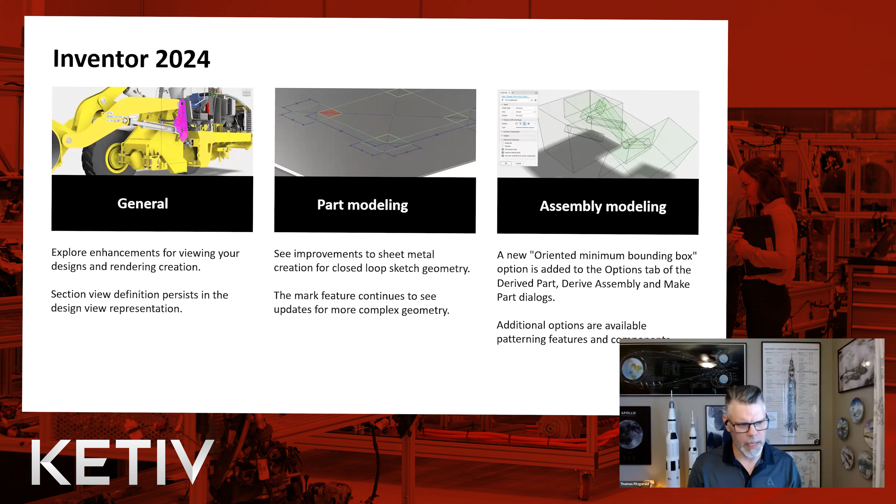All right. So the way that this presentation is broken out, we're going to be looking at very specific categories of features within the general feature upgrade environment, part modeling environment, the assembly modeling environment. There's a new feature for finishes that we're going to be talking about in the presentation. Autodesk has provided a few updates relative to 3D annotations. Those of you that are using 3D annotations, you might find some pleasure in understanding more around those updates.

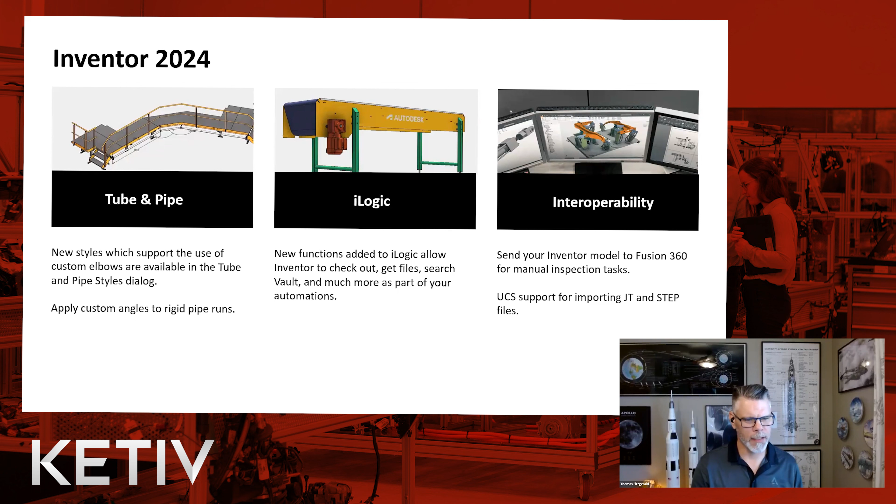In the drawing environment, there's a number of different updates that we're going to be talking about as well. Tube and pipe, there's a small updated feature there that is going to be impressive for those of you that are interested in and utilize the tube and pipe environment. For all of my iLogic fans out there, there's a really interesting capability that has been enhanced within iLogic, very specific to Autodesk Vault, that I'll be touching on, and then some interoperability updates as well.

All right. So getting into the general enhancements for the Inventor application. Section view definition persists in the design view representation.

With this release, you can easily edit the section view definition or suppress the section view by right-clicking on the view representation node and clicking section view. You can edit or suppress. So some updating in the right-click menu in terms of what you can do around your section views.

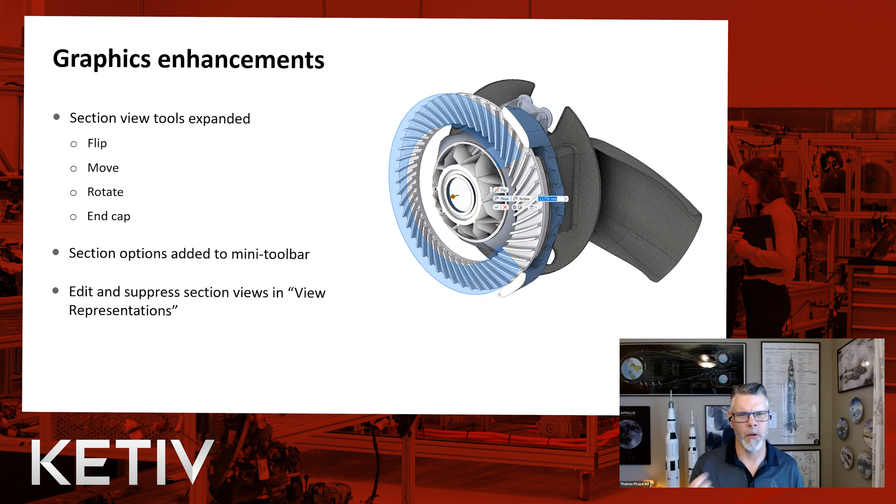Previously, you could only access section views using the context menu commands. Now the section view commands and options are added directly to the mini toolbar. So as you've noticed over the previous releases, Autodesk has been updating the UIs and the different toolbars that you interact with different functions and features. This is kind of to align with that initiative of updating the look and feel of Inventor for users.

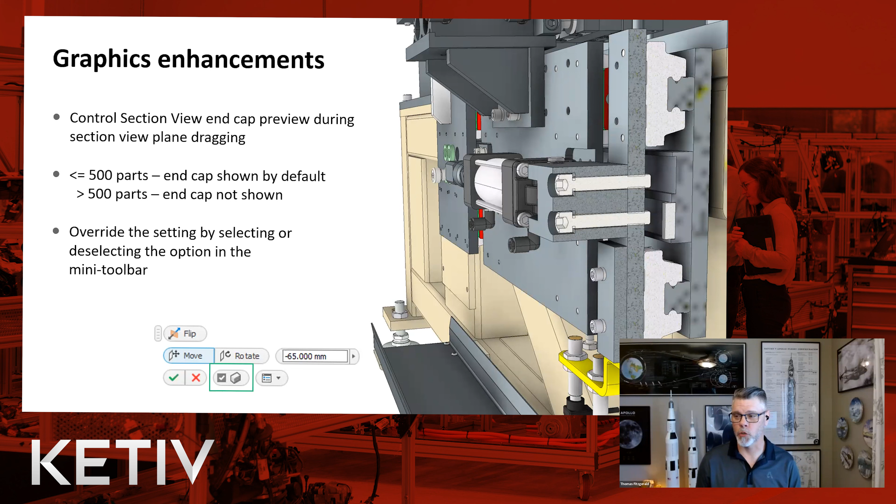In terms of graphics enhancements, there's a control section view end cap preview during section view plane dragging. So as you drag the section view, you're going to see additional information to assist you in your section view functions there. So end cap visibility is set by default to display end caps for sectional geometry when the part count is less than 500. If the part count is greater than 500, then the end caps will not display.

And this is for performance reasons, right? We want to minimize some of that graphical information that we're being presented so that way you have a better performance experience when using Inventor, okay? So you'll see there's an opportunity to check a box and to turn on end caps or not turn on end caps.

Other things relative to graphics enhancements, there's a resolution maximum now set by 16K. There's also the availability of utilizing image-based lighting styles when you're working within Studio. So if you want to do a photorealistic rendering of something that you've produced inside of Inventor, you can pull in a background that gives you a more realistic look as that environment that you might be putting your information or your 3D data in. Okay, and there's also a ray tracing update for those of you interested in photorealistic renderings.

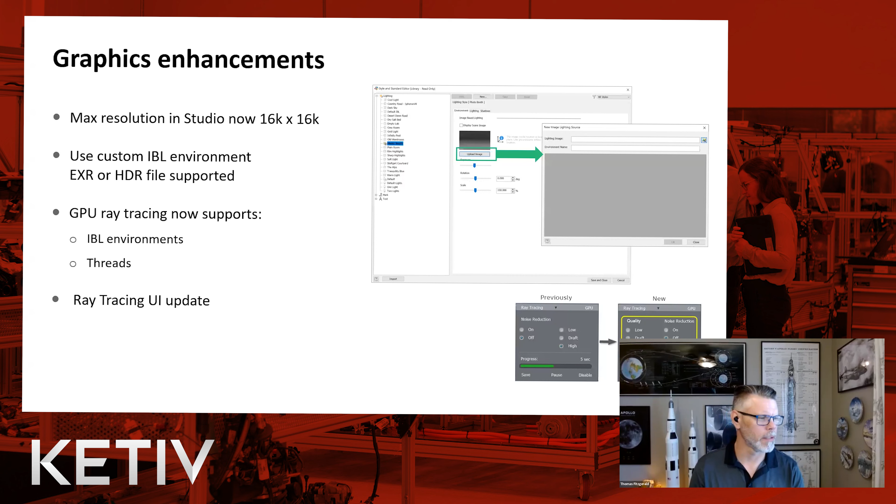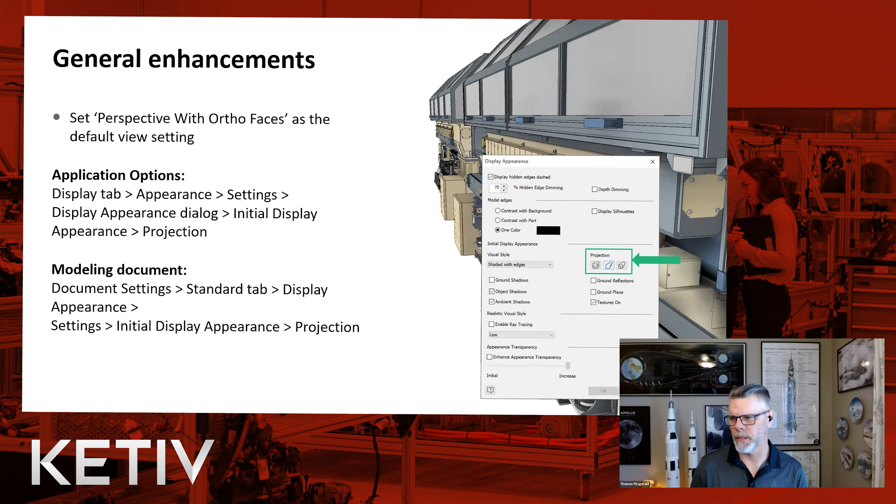Some other general enhancements, really around setting ortho faces. You'll see that inside of your application options, there's another button for your projection views. So now you have an opportunity for ortho faces to turn on and off, setting right within your application options. Okay.

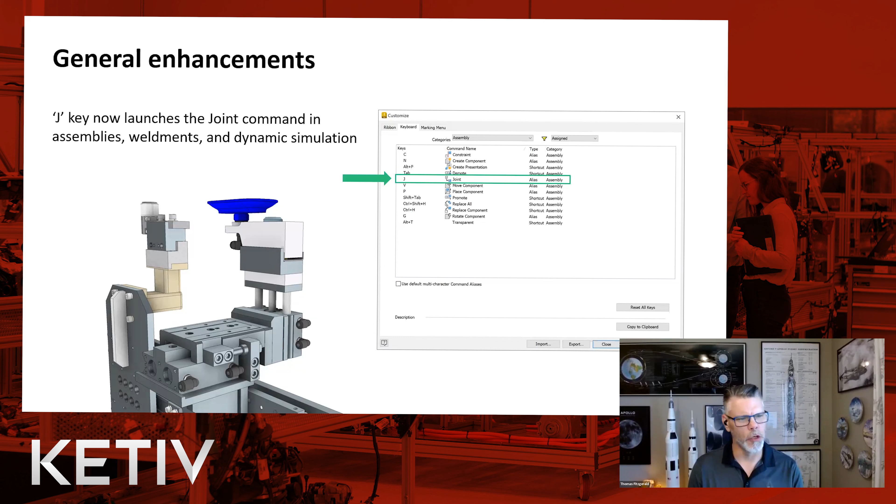In terms of hotkeys, I'm sure there's a few of you out there still using hotkeys to quickly initiate different commands. There's a new one for the joint command. The J key is a default hotkey now for if you're using joints in conjunction with constraints within your assembly environment. Okay.

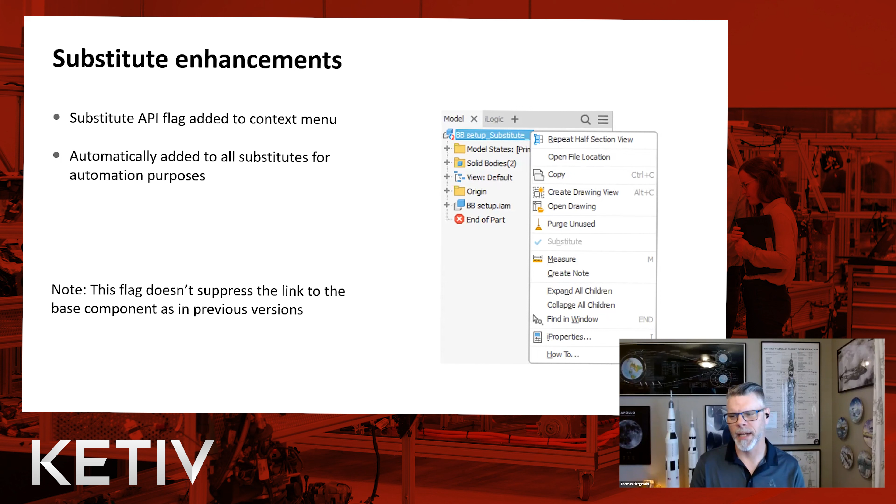When it comes to working with substitutions, if you're really the kind of company that's utilizing large model design, if you have a lot of different parts and you leverage substitutes in order to enhance that performance of those large models, there's a way to flag now within the context menu if you create a substitute, if it's a substitute or not. So you have a little bit of visibility as to which one of your models are actually substitutes as opposed to non-substitutes. So this change affects primarily part documents. Whenever you have a new part document in the context menu, it'll let you know if it's a substitute or not. So once again, better communication and visibility.

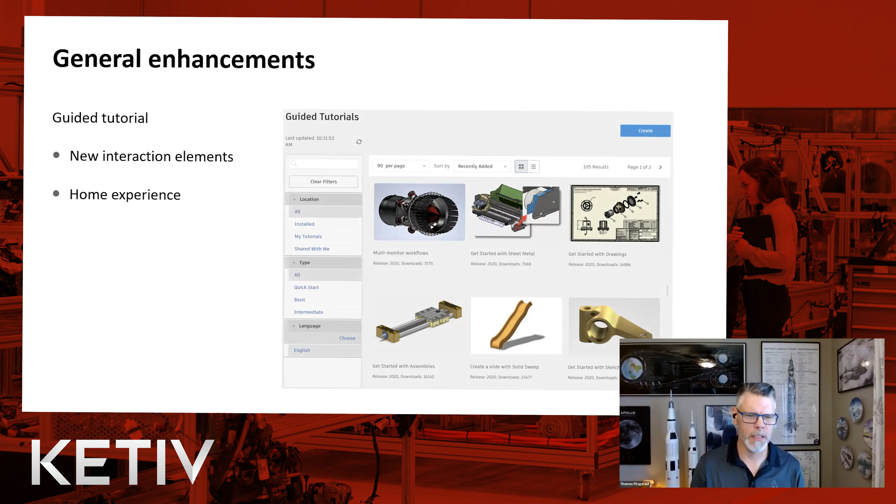Within your general enhancements around your guided tutorials, the home experience is a little bit updated, so you can peruse and navigate through your guided tutorials a little bit better. So that way, if you're trying to access very specific information to learn how to do particular functions or activities, the user experience here is greatly improved for you to be able to find the information that you're trying to access. All right.

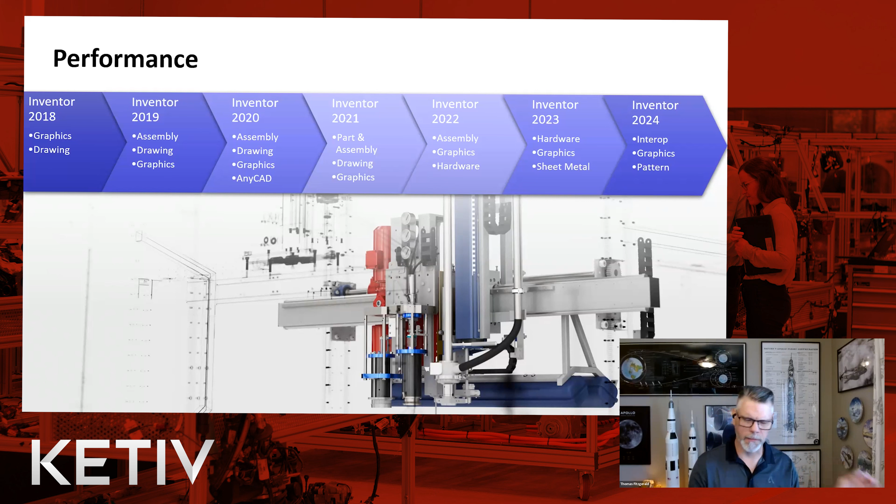So over the course of the last series of releases, performance has been a big issue, something that Autodesk has been really trying to focus on. In Inventor 2018, 2019, you'll see the entire life cycle here of performance improvements over the previous releases. So in 2024, we're focusing a lot in terms of performances around interoperability, graphics, and the ever so demanding patterns, working with different patterns within our part environment as well as our assembly environment. All right. And here's a video around the graphics area.

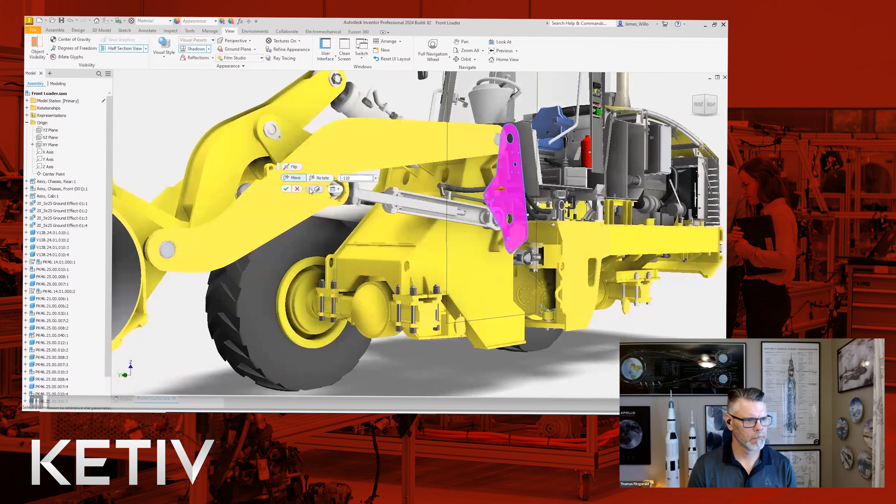In the application options, it's now possible to set perspective with ortho faces as the default display appearance. We've also improved the sectional view tool to add an end cap toggle. This helps you to see more clearly which solid items the view is directly cutting through. Another cool feature is the ability to rotate a sectional view. Click the toggle button in the mini toolbar and then use the in-canvas overlay to rotate the cut. This is also supported in 1/4 and 3/4 sections.

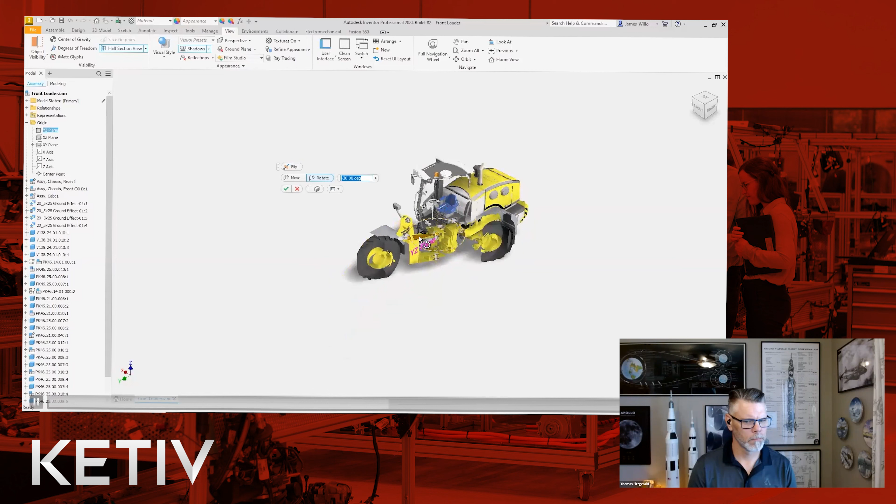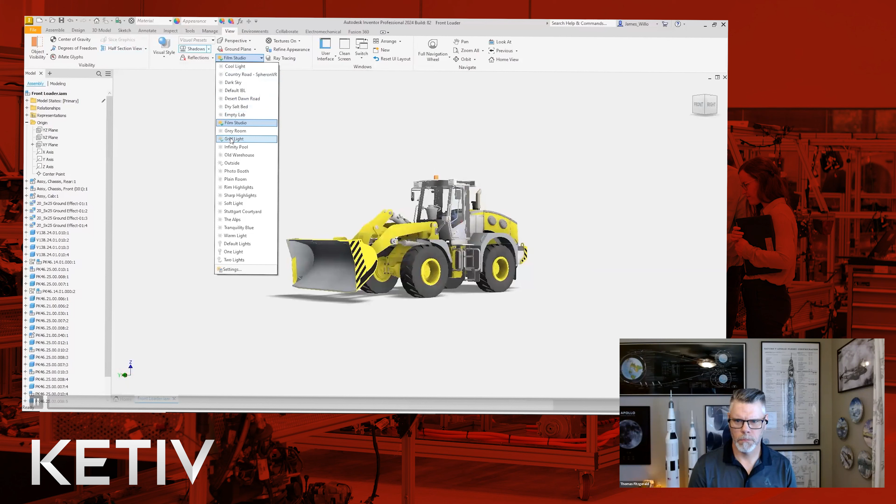We've made it much easier to create your own IBL environments. Simply create a new style, click Upload Image, and then select the HDR image you want to use. There are hundreds of different HDR images on various third-party websites for you to choose from. And if you prefer to use Inventor Studio for your rendering, we've increased the maximum render resolution to 16K. All this and much more in Inventor 2024.

All right. So as we go through each one of these sections, there's going to be a few of these small little 1 or 2 minute videos kind of demonstrating some of the features that we're talking about.

So, part modeling enhancements. Some of the things that we need to be focused on in terms of the part modeling environment: there's been some enhancements around sheet metal profile definition. So as you have different profiles, closed loop profiles within your sheet metal sketches, there's better performance in terms of being able to detect which profile you actually want to utilize within your sheet metal face.

When it comes to parameters, this one's popular for me, because I thoroughly promote parameterization of all models, particularly if you're going to be using automation. There's now a way for text and Boolean values to be exported, so we can use parameters within properties that are relative to text and Boolean parameters. We also have an option for true/false, 0/1, or yes/no, as well as a new unit type for parameters that has to do with hardness.

The mark feature. So new behavior around the mark feature. We have an opportunity to have it aligned, or we can have it go across the surface, as well as wrapping around the surface or projecting to a non-planar face. So additional functionality around the mark feature.

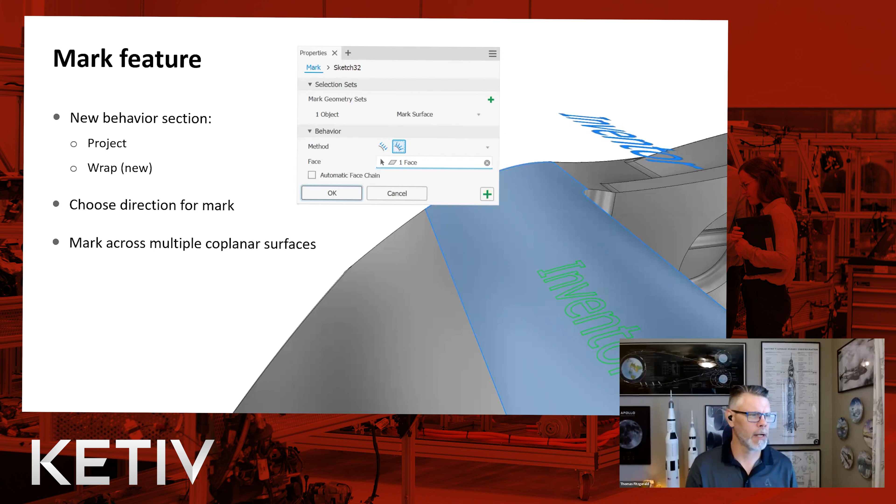The parameters window has 2 new improvements in Inventor 2024. The parameter window extends export functionality to text and Boolean parameters in the user parameters section. This allows us to access parameters in other places, such as the iProperties, where we can insert them as part of a live description, or simply display them in the custom iProperties tab.

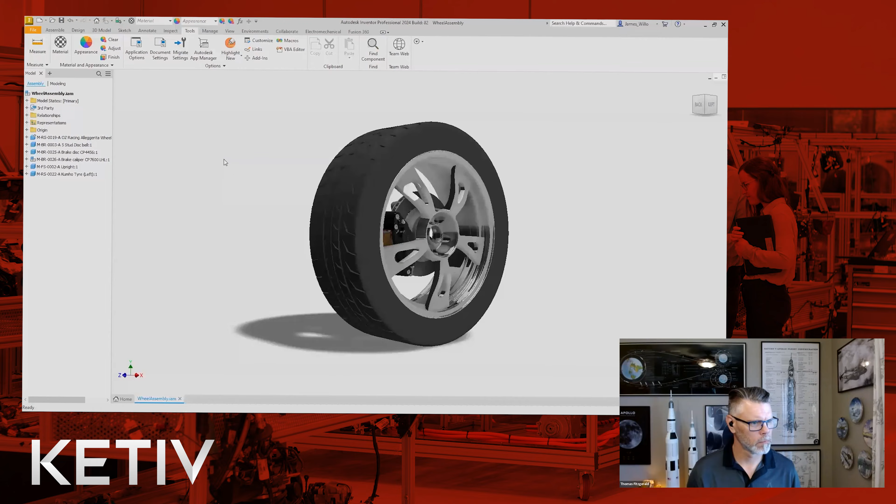Autodesk Inventor 2024. We introduced the mark feature in Inventor 2023, allowing you to laser etch or mark parts. We've now improved that in 2024 by adding a behavior section to the property panel. In addition to being able to etch in 3 different directions, there are now 2 different marking methods. Project will apply the mark across all faces in its path, even if they are not coplanar.

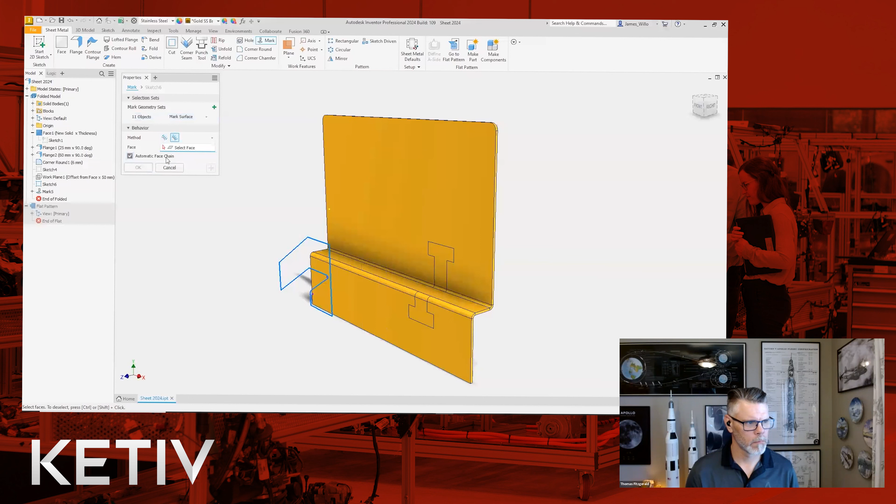We've also added the ability to wrap a mark. This allows the mark to be wrapped around corners or be applied to curved geometry, such as shafts or cylinders. And here are those same marks in the flat pattern. So that's the mark feature in Inventor 2024.

All right. So a couple of enhancements there in the part modeling environment. Now on to the assembly modeling environment. So enhancements here in assembly modeling. This is an interesting one. If any of you are using bounding boxes to understand spatial requirements of the 3D data that you may be producing, now there's an oriented minimum bounding box opportunity here.

So with oriented minimum bounding box, you can derive a solid body as an oriented minimum bounding box. The new option is added to the options tab of the derive part, derive assembly, and make part dialog boxes, so you're only going to see it in those particular dialog boxes. By default, the option is checked. Uncheck the box to derive a body as the orthogonal bounding box.

So as you rotate your different components, the bounding box will rotate with it, as opposed to being oriented relative to the environment in which you're working. Now, I don't know all the exact benefits of this. I would assume it would really have to do with understanding a true value when it comes to the amount of space that individual components or assemblies may be consuming.

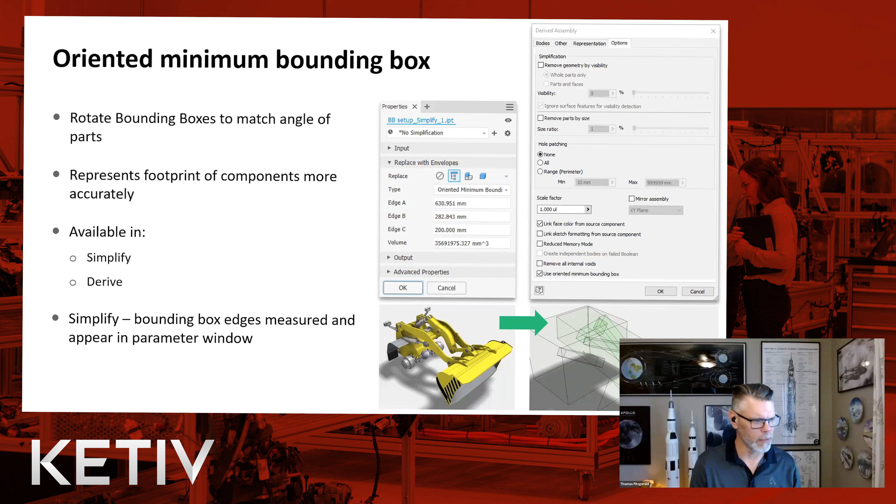Different pattern enhancements, particularly around circular pattern. So you can now select a revolved face, a cylindrical or conical face to define the direction for a component pattern. So the pattern component command uses the face axis to determine the pattern direction; use the standard controls to then flip it back and forth.

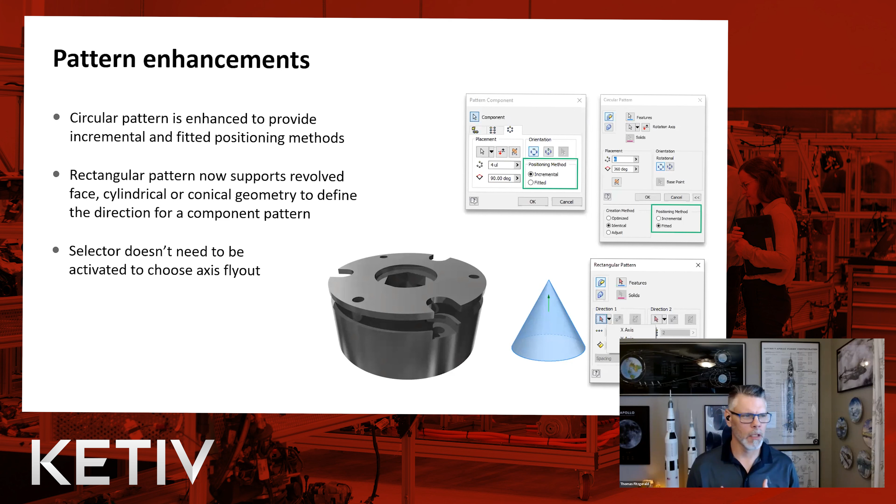It is not necessary to activate the selector when using the origin axis. Clicking the flyout activates the selector and chooses the selected axis. The direction selection does not change with the activation of the selector. You must also select a new direction. So it's prompting you for some additional information just to make sure that the circular pattern is working the way that you have anticipated. Okay.

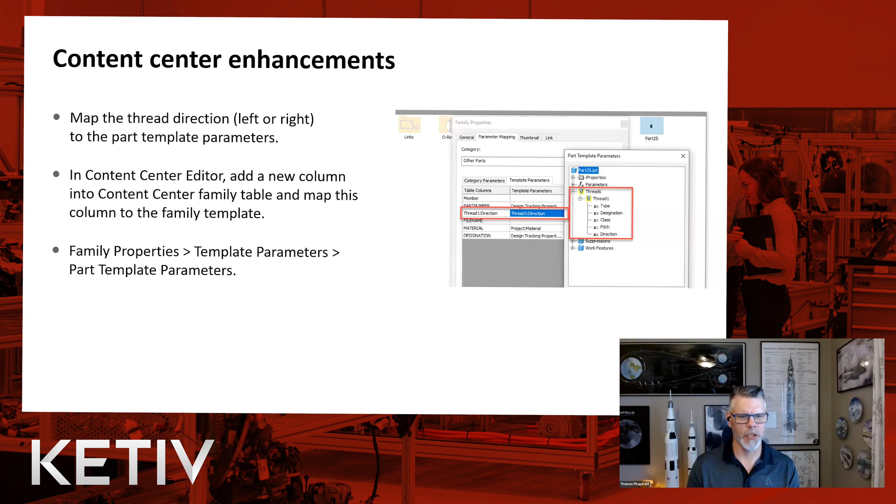There are some content center enhancements. When it comes to authoring custom content center information, you now have the opportunity to define your thread direction. So aside from type and designation and class and pitch, there's the new opportunity of being able to provide a thread direction as well.

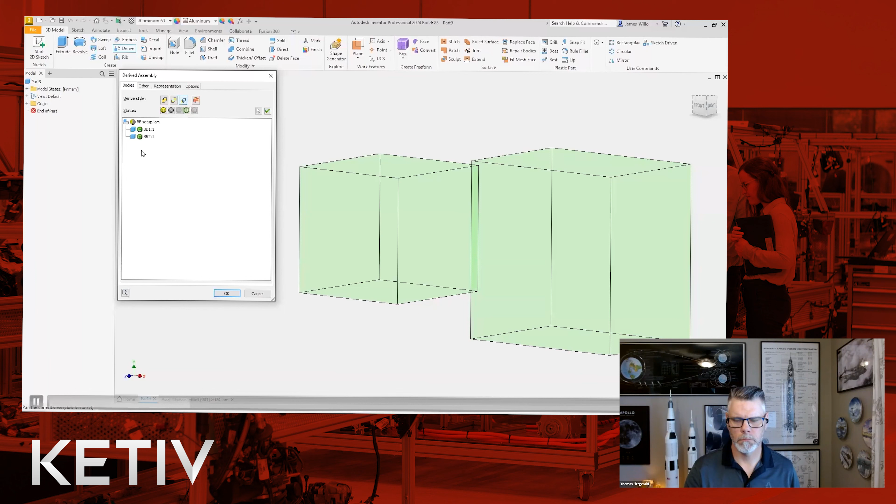We've added several new workflows in Inventor 2024. So let's take a look at oriented minimum bounding box. These are 2 identical cubes, except one of them has been drawn at 45-degree angles. If we apply a standard bounding box to them both, the green cube takes up more space than the blue cube. This is because the envelope is drawn in relation to the origin of the part.

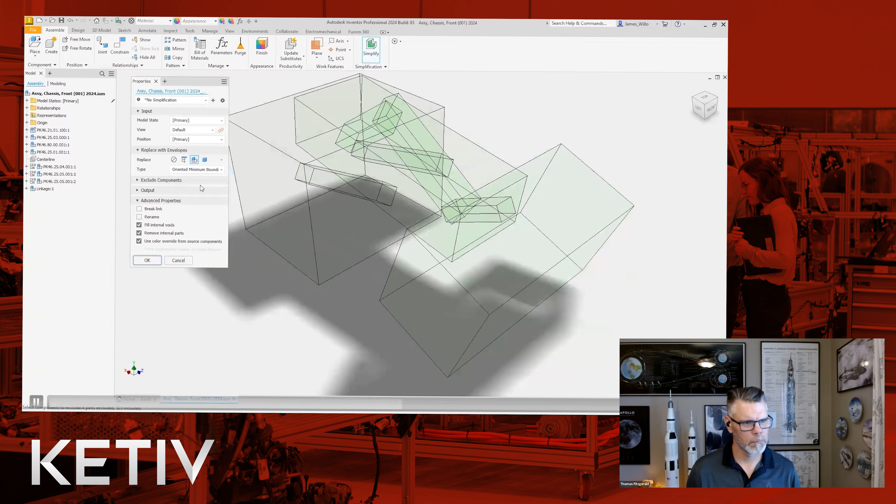If we use the new oriented minimum bounding box setting, we can see that the green cube now gets a rotated envelope that more accurately represents how much space it occupies. Let's take a look at this on a larger assembly. This new workflow is also supported within Simplify. When using a standard orthogonal bounding box, these parts look like they are occupying a lot of space. With oriented minimum bounding box, intellectual property can be removed whilst also giving a more accurate representation of the space required. This is particularly important when delivering an item.

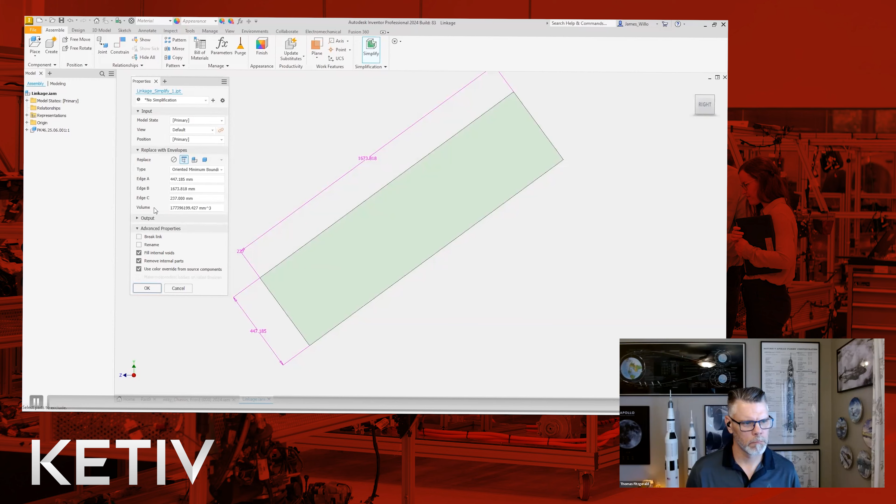If a standard bounding box is applied to this linkage, we would need a shipping crate that is 1.6 meters by 1.5. However, switching to an oriented minimum bounding box shows that we only need a crate a third of that size, 1.6 meters by 440 millimeters. In addition to this, when creating a single bounding box, the edge dimensions of the area will be pushed through to the parameters window and can be used in 3D annotations or the drawing environment. All this and much more in Inventor 2024.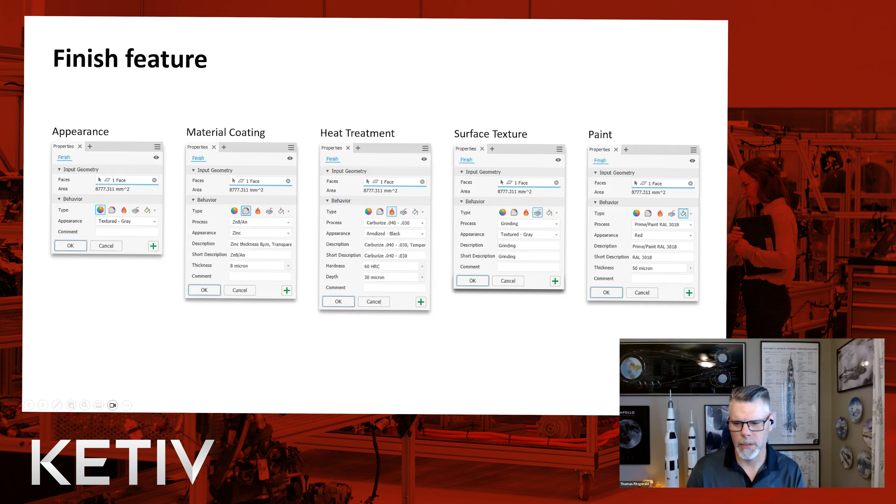This is kind of a snapshot of the different dialog boxes where you're going to be able to access this information in terms of appearance, your material coating, if there's any heat treating involved, any surface texturing, and then of course, any painting that you want applied. So you have different types here that you can toggle between and then input the specific finish information. And once again, this will carry over from your 3D models into your 2D drawings. Here's a closer look at the finish tool, new in 2024.

Appearances are a great way to colour our parts, but they don't tell us anything else about the manufacturing process. With the new finish feature, appearances can be combined with rich data to describe the manufacturing process. In the new property panel, we can apply material coatings, heat treatments, surface texture, or just paint it.

We'll demonstrate adding a heat treatment. A drop-down allows you to choose a specific process. This could be case hardening, for instance. And then we attach an appearance to it. Descriptions can be added, and then of course, the hardness, which is a brand new unit type for Inventor 2024, and supports many different units, such as Brinell, Vickers, or Rockwell. Then simply select the faces to apply this finish to.

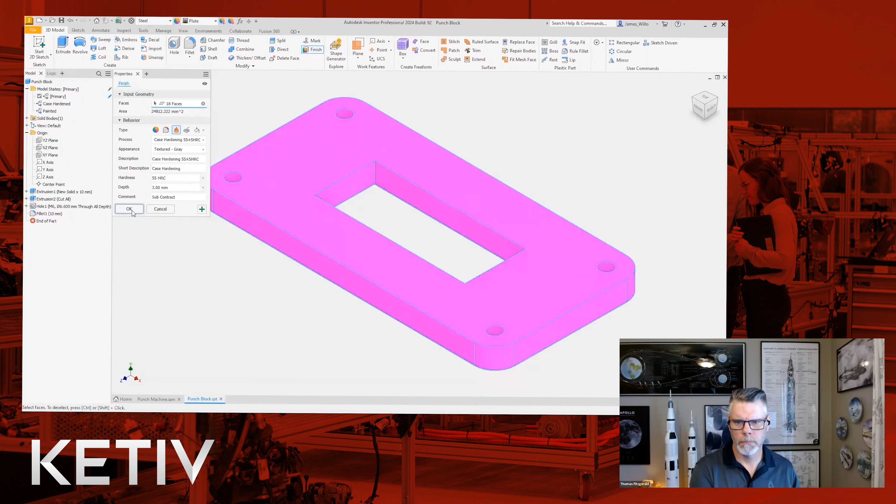In the browser, there is a brand new folder created called Finishes, where we will see a list of all finishes applied to the part. This means we get a really great overview of the processes required for this part. And if we hover over the finish, it will highlight the areas of the part that it is applied to.

Model states are also supported by the Finish tool. So when we switch between model states, we can suppress and unsuppress finishes. Also note that some value input fields also support applying a tolerance.

For the second model state, we'll just paint it. Choose the process from the drop-down. This could be powder coat, spray, roller, or any other method. Pick the appearance and then enter a description to be used later on in the drawing or 3D annotation environment. The paint thickness can also be specified. Choose the faces to paint, and that's the base coat for this plate.

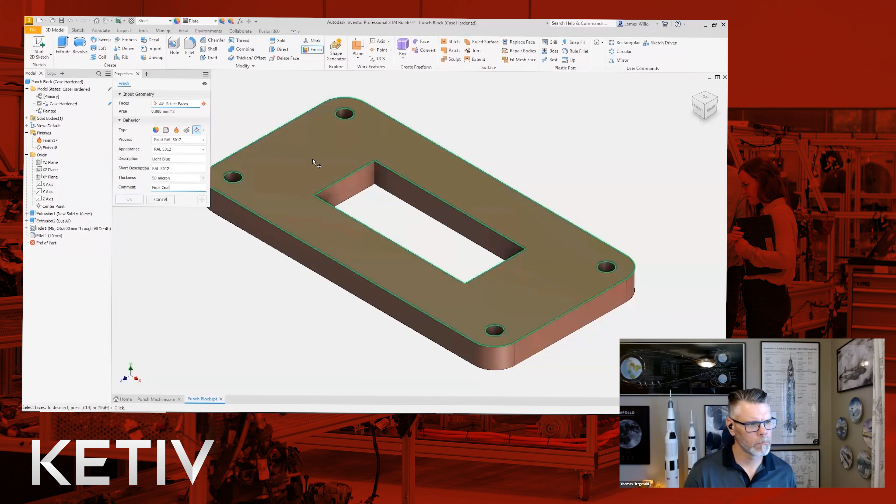Using the same model state, we're now going to layer a second process on top of that. This is something we couldn't do before with standard appearances. Apply the final coat of paint and add some notes. And then again we'll pick the faces we're going to paint.

You'll notice that when I click OK, the blue paint will override the primer in the graphics area, and that's because finishes respect the browser order, so the finish at the bottom will always be the one that is visible. And of course, these finishes are controlled by the model states.

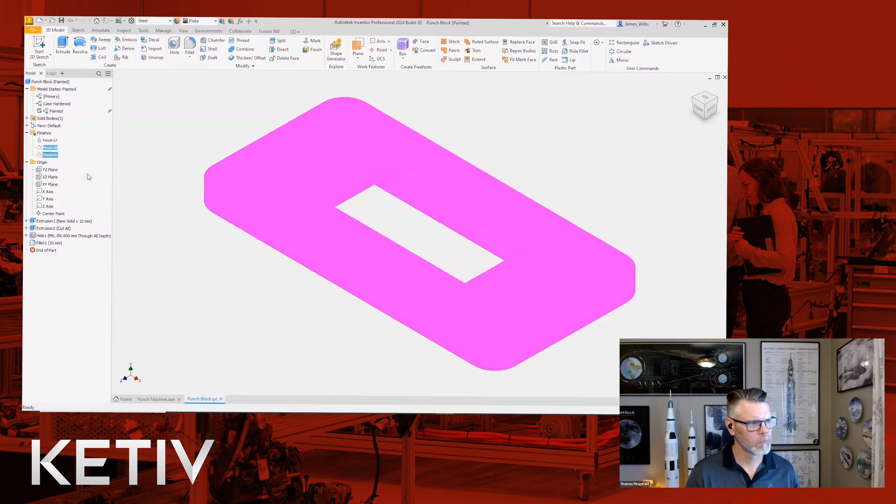All values entered into the finish command are accessible from the parameters window, so we could use the values in here to calculate how much paint we need for an entire frame. And in the drawing environment, or model-based definition, we can retrieve the finish information. A new type category in the leader or general text box allows you to choose any of this finish manufacturing information, allowing it to be automatically updated whenever a change is made.

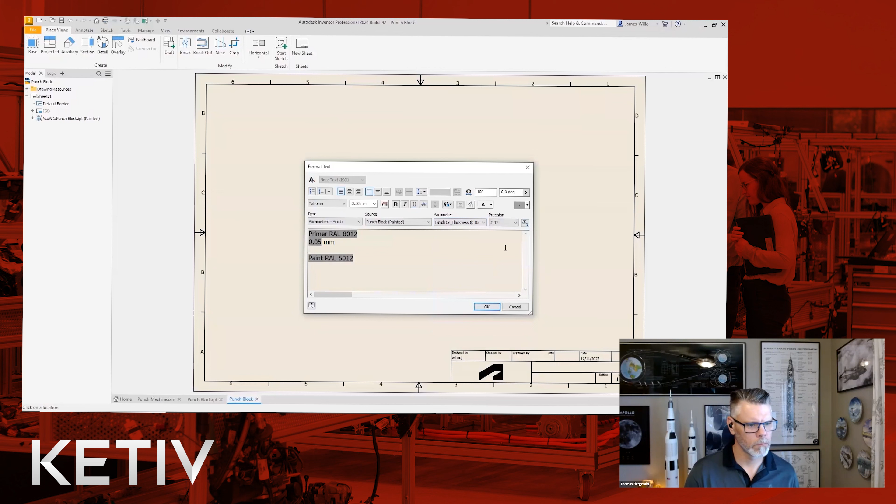And by stacking these notes together, we can show the full manufacturing process in a single note, making it much clearer how this is to be made. All this and much more in Inventor 2024.

I think that one is a big one, guys. I've been saying it for many years, when it comes to working inside of Inventor, whenever we're working and developing our information, there are some things that we just typically don't model. If there's fluid involved in a particular tank, we won't add that fluid. In some cases, if there's paint involved within some sort of design, we don't add that as well. We don't account for that.

Now we have the opportunity to be a little bit more thorough, as well as comprehensive in terms of identifying the information we need to convey, not only in our 3D models, but also in our 2D documentation. So I think that's a really interesting feature, and it's going to help out in terms of capturing the reality of our 3D designs. Thinking about what else we can do around 3D designs, 3D annotation enhancements.

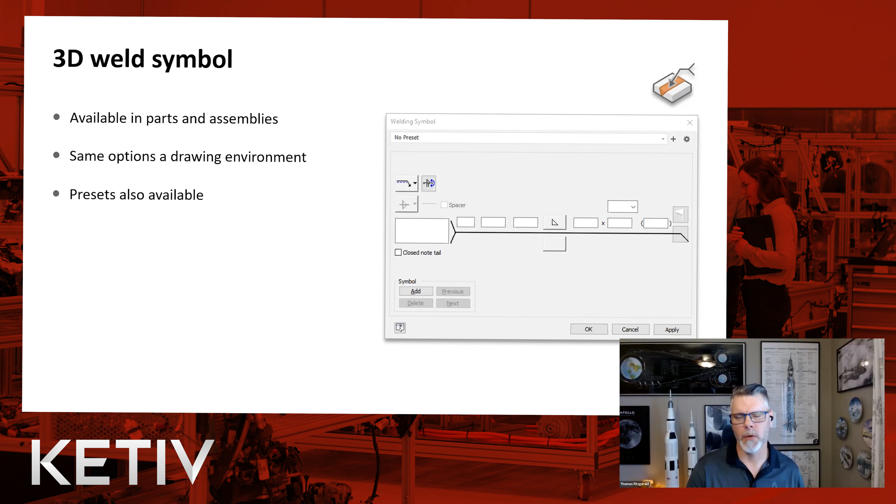There's a couple small enhancements here relative to working within 3D weld symbols. So 3D weld symbols are now available as one of your 3D annotation types. Create and edit weld and sub-weld symbols in a part or assembly model. Then retrieve those associative symbols within the drawing. So 3D weld symbols are included in exports to 3D PDF, DWF, as well as shared views.

Additional 3D annotations also have to do with working with envelope requirements, as well as the 1:5 scale, which is now available within the drop-down list and wasn't there previously, as well as the all-over tolerance option. So when you're applying your different tolerances to your different symbols, you now have the opportunity for all over as well as none and all around.

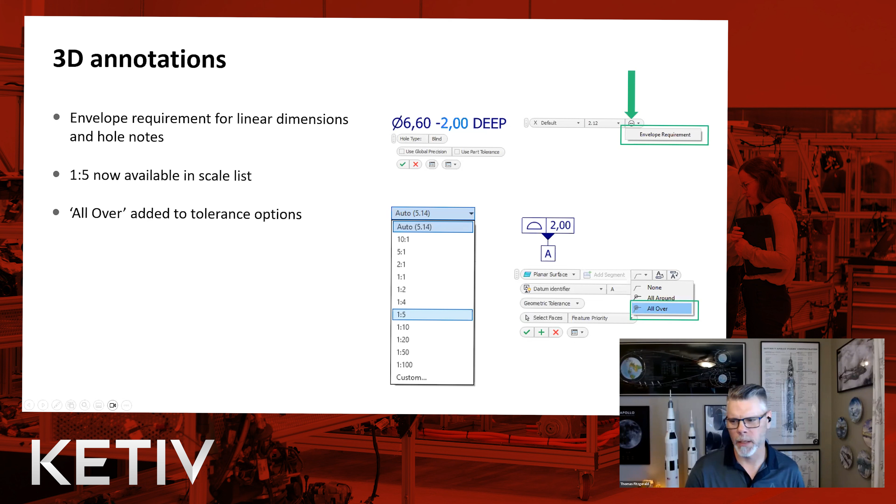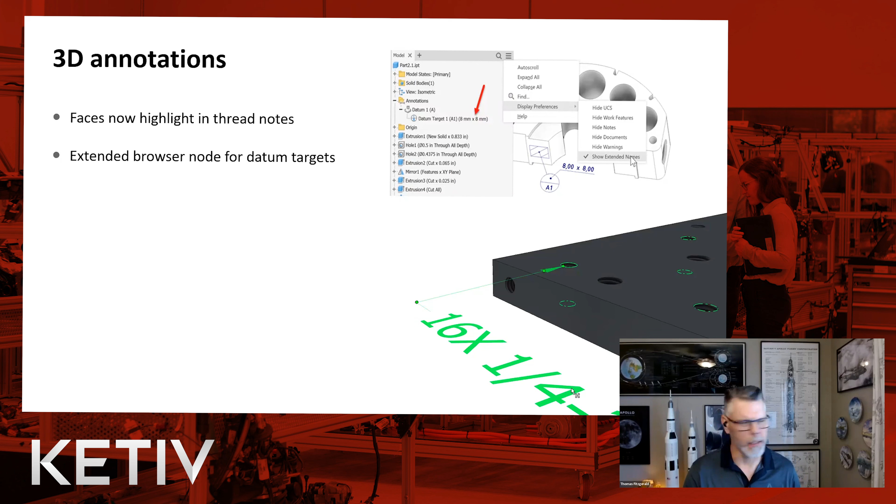Another 3D annotation update, faces are now highlighted in the thread notes. So as you select the thread note, it's going to highlight the different faces, so you have some sort of visual representation as to which holes have a particular thread note associated to them. All right. And then here's a video talking a little bit about model-based definitions.

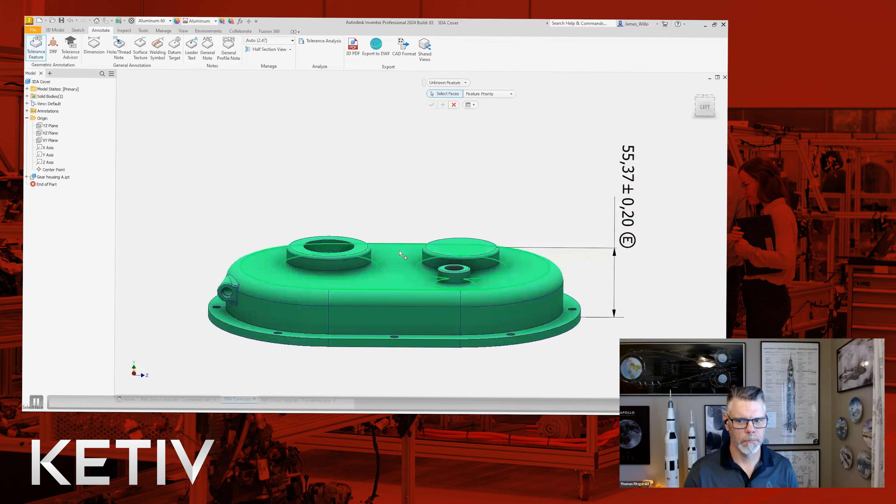In Inventor 2024, we've added a few enhancements to the 3D annotations environment. When applying a linear dimension, it can now be specified as an envelope requirement. We've also expanded the annotation scales to include 1 to 5. When annotating the profile of a planar surface, it was previously possible to specify all around. Inventor 2024 adds all over to the tolerance options. All this and much more in Inventor 2024.

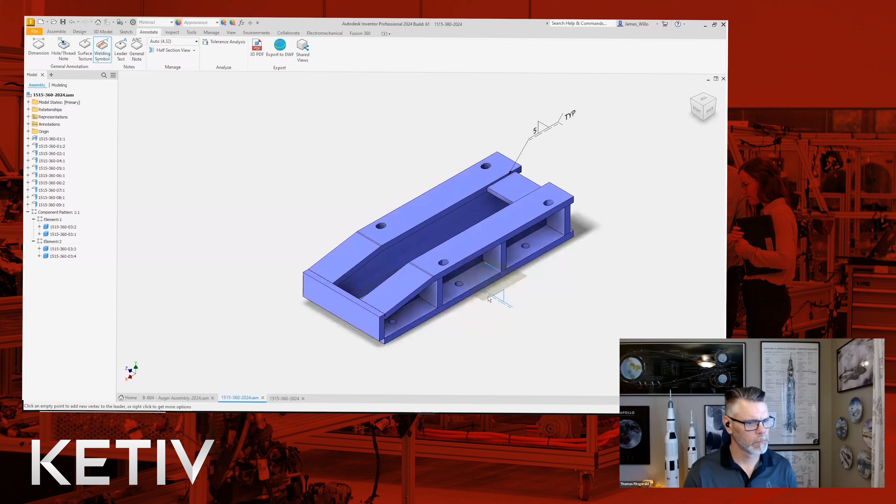In Inventor 2024, once again we have improved model-based definition. On the Annotate ribbon, there is now a welding symbol option to allow you to add welding PMI information to your designs. The dialog is almost identical to the drawing environment, allowing you great flexibility over your welding symbols.

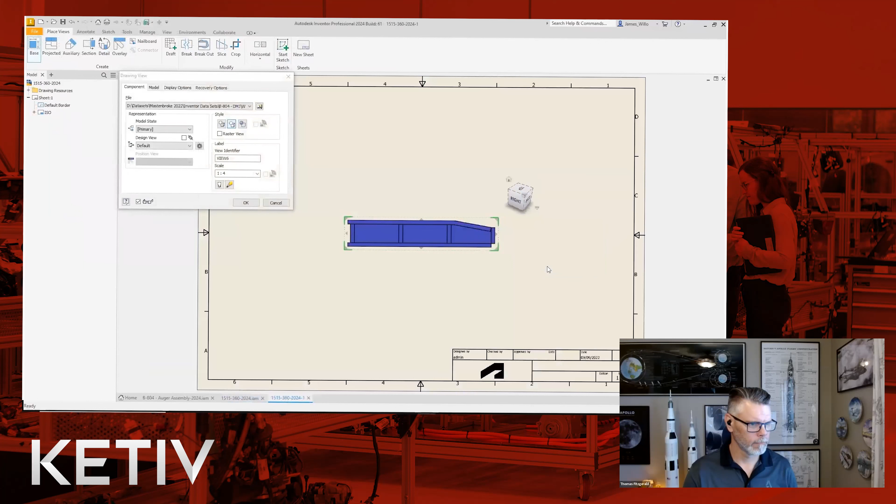Of course, as always, we can bring these notes through into the drawing environment. Remember, we don't have to use a weldment assembly for this. 3D weld symbols are also supported in normal assemblies and even multi-body part files. And with QIF or STEP 242, we can export this information to other systems and viewers. All this and much more in Inventor 2024.

Some real good enhancements there for 3D annotations. Those of you that don't have a lot of familiarity around 3D annotations, I encourage you to check those out. As technology advances and as we're trying to move away from consuming as much paper, being able to represent your dimensions and your annotations within the 3D environment as opposed to a 2D drawing can be extremely beneficial as we start leveraging more and more of these technologies. So once again, I encourage you to check those out to see if there's a place for 3D annotations within your different workflows. All right.

Going on to the drawing environment. So there are a few enhancements here relative to the drawing environment. One of those has to do with being able to provide the sheet name. So whenever you're doing formatted text and we want to understand the different sheet properties, previously we had sheet number, sheet revision, and sheet size. Now we have sheet name as well. So just extending some of that functionality around how we can display some of that information.

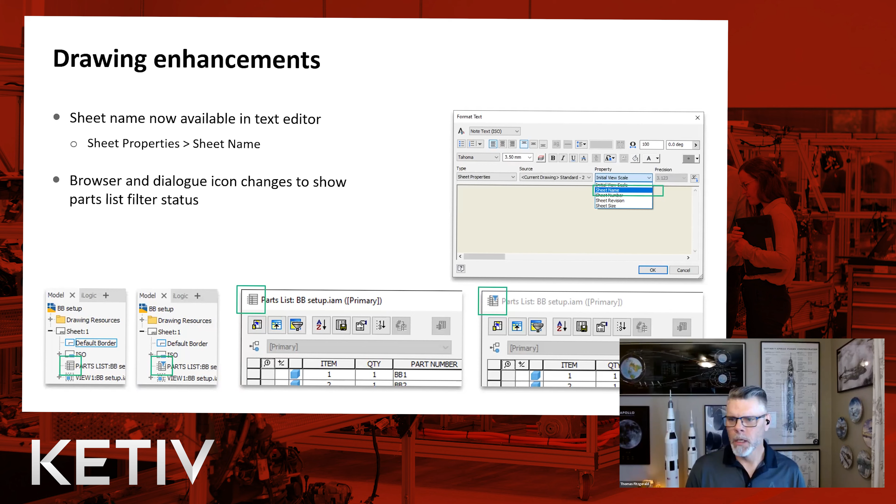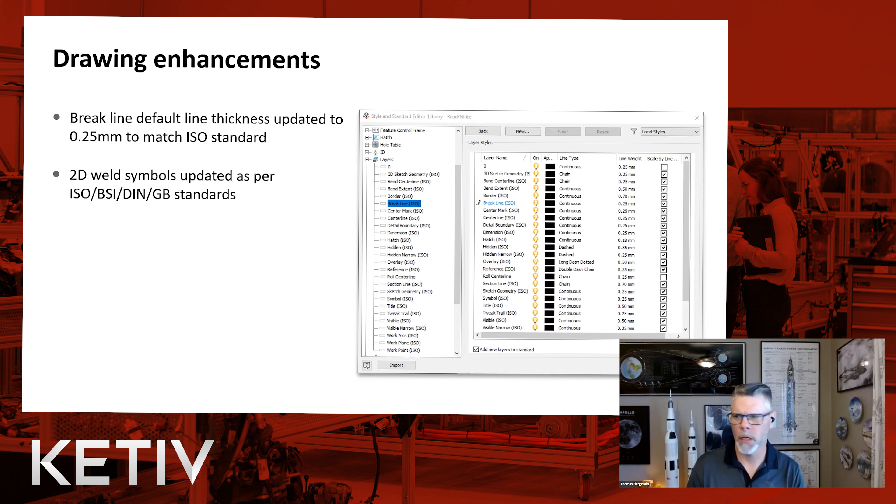Some other drawing enhancements have to do with being able to change the line thickness. Particularly in this one, it's around the break line layer. We can change the thickness to match the ISO standard, as well as 2D weld symbols. They're updated relative to ISO, BSI, DIN, and GB standards. So once again, extending some of that functionality around displaying our drawings a little bit more effectively.

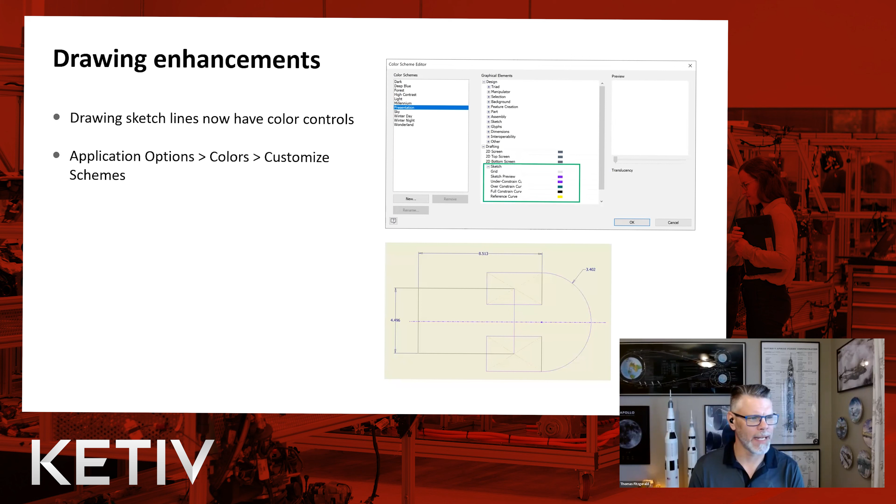Another enhancement has to do with drawing sketch lines. So previously we didn't have the opportunity to change the colors of drawing sketch lines. Now we have that opportunity where we can change our color schemes to the different entities incorporated within our drawing environment.

Also, we have the opportunity now to apply revision clouds. So revision clouds are now on the annotate ribbon. We can now add them to our drawing sheets or drawing views, move them around, add or delete different vertices, and check whether they are attached to anything. And just like any other annotation style for formatting, this is managed within the styles editor. So additional functionality, but the look and feel and being able to navigate in the environment is going to be very, very similar.

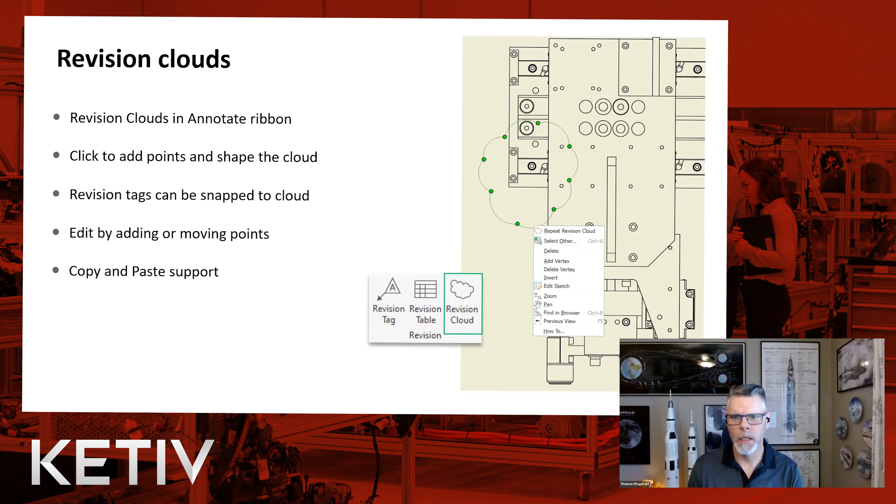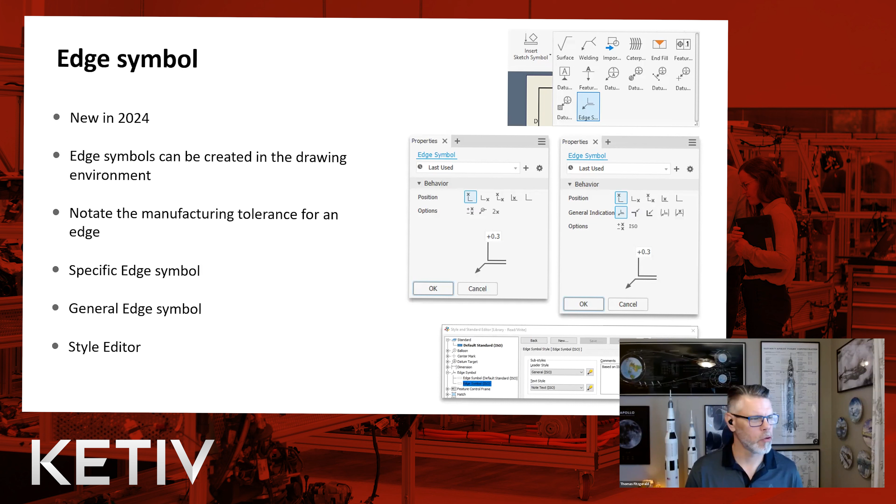We also have the opportunity to provide an edge symbol. So this is a new feature in 2024. Edge symbols are based on the ISO 13715:2019 standard. The new edge symbol command is added to the symbols panel on the annotation tab. The edge symbol style is added to the drawing style, so you can access it within the styles and standards editor as well. Okay. And now here is a short little video talking about some of these enhancements within the drawing environment.

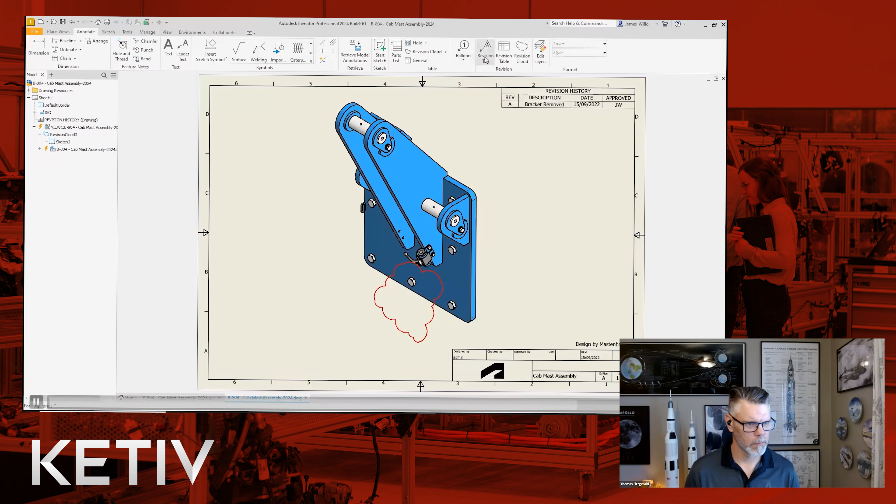In Inventor 2024, we've added another highly requested feature to the drawing environment in the form of revision clouds. Simply pick your view, draw a cloud, and create. And it's so easy to edit afterwards by just dragging the nodes. You can then go to your assembly and make your changes, such as deleting this bracket. The line color of your revision cloud can be changed in the object defaults by simply moving it to a different layer. And revision tags can be snapped to the cloud to further clarify your changes. All this and much more in Inventor 2024.

And here's a short video around edge symbol functionality. In Inventor 2024, we've added the brand new Edge symbol command to the drawing environment. The property panel contains many different settings for customizing your symbol. Various positions can be chosen from, such as vertical direction, horizontal, or no values at all. Values can be typed directly into the images where required. There are also 3 options that can be applied: value range, all around, and a multiple face modifier.

General notes can be created by clicking directly on the sheet outside of a view. Here we have further types, such as specific edges and majority symbols, supported by the options of value range or ISO standard. Again, we can type values directly into the image, and there's also a handy function for adding the plus/minus symbol. All this and much more in Inventor 2024.

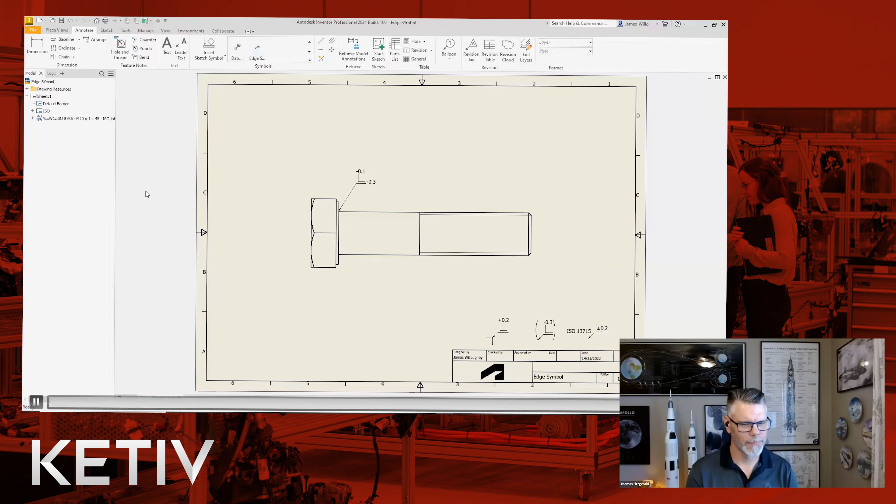All right, tube and pipe. So those of you that are using the tube and pipe functionality within Inventor, you'll be pleasantly surprised to see this update. I've heard this time and time again: why can't we create elbows other than 45 and 90 degrees? Well, guess what? Now you can in 2024.

So in previous versions of Inventor, it was only possible to add 45 and 90 degrees. Starting from this release, it is now possible to apply a custom angled elbow. So when the style with custom elbows is activated, select the custom elbows option in the route dialog and either use the curved arrow or type a value of the angle for the elbow that you would like to have.

Minimum and maximum angles are defined in the custom angle column within the content center part itself. So some additional functionality in terms of being able to create new custom elbows for your tube and pipe routes and runs.

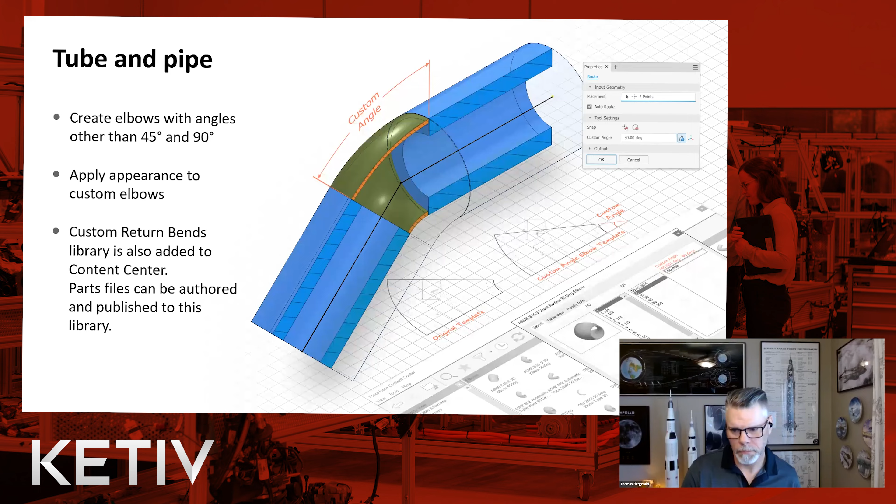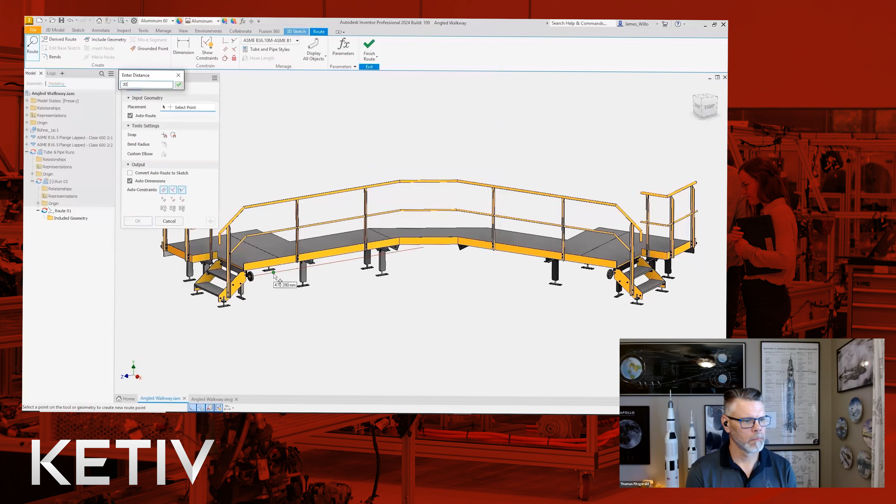Inventor 2024 brings a new feature to the tube and pipe environment. Custom elbows are now available in tube and pipe styles. First, edit a style to have custom elbows and select a suitable elbow from the library. Normally when routing a pipe run, Inventor will only let us add a 45-degree elbow.

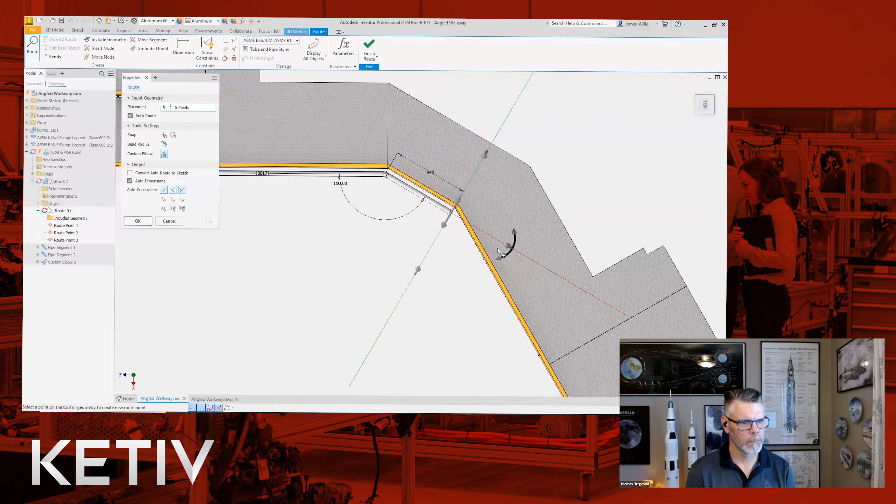By clicking on Custom Elbow in the new Property panel, the manipulators become curved and we can snap to any angle required, in 5-degree increments. This can be fine-tuned by simply typing in the angle required. Inventor will then add a custom angled elbow into your pipe run.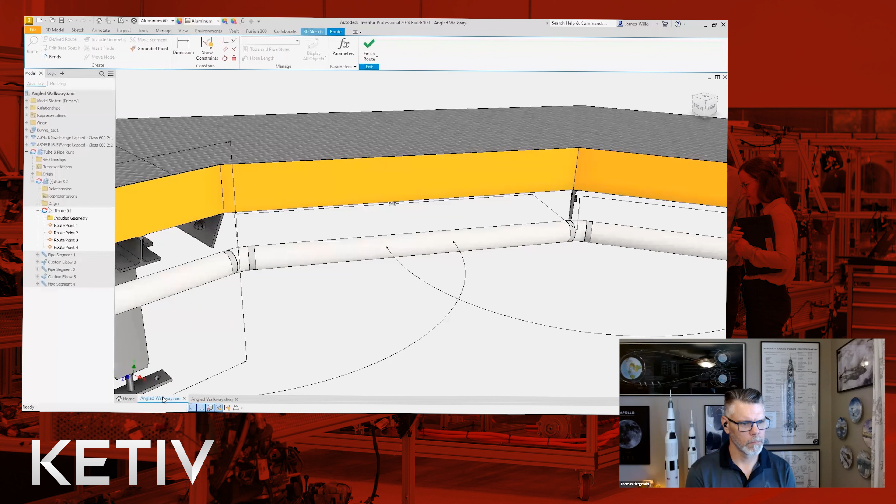This will also show up on the bill of materials, and of course in your parts list in the drawing environment, along with the angle that you chose. And finally, if you want the custom elbows to stand out, or if they are normally made from a different material, you can also do this in the tube and pipe styles. By setting the appearance to green, I can instantly see which elbows will need to be custom made. All this and much more in Inventor 2024.

That's a valuable enhancement. All right, iLogic. So some new things in iLogic for those of you that are out there developing some of your own automation using iLogic. You'll be happy to hear that now we have snippets available right within the iLogic rule editor that allows us to have interaction with Autodesk Vault. I will make a note though that this only works if you're using Autodesk Vault Professional. If you're using Vault Basic, you cannot access this within iLogic.

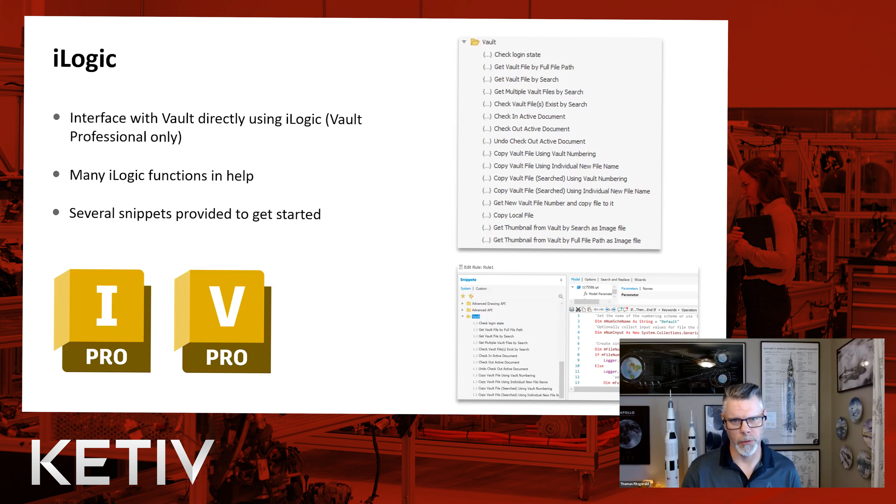So many of these iLogic functions, like I said, will automatically be snippets where you can do certain things like getting a file, checking in a file, checking out a file, getting the latest version, copy a file using Vault numbering. So some very useful tools if you're developing iLogic code that need to interact with Vault Professional.

Some other elements around iLogic is we can now insert custom content center parts. And now there's snippets available for us to be able to close and open forms. So in previous versions of Inventor and iLogic, we had snippets to open a form. So if there was a form that we had created, we can call that form and open it, but there was no way to really close it.

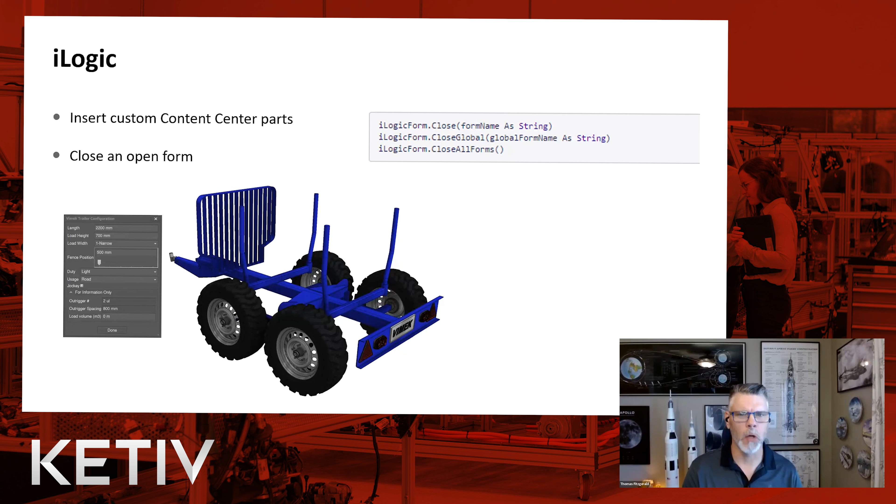So now we have code where we can actually define a particular iLogic form that we want to close during a particular interaction. So we can prompt a user, show up a form. Once they do some sort of event or activity, we can then call it to close that form automatically for us. So here is a short video about the Vault functionality out of iLogic.

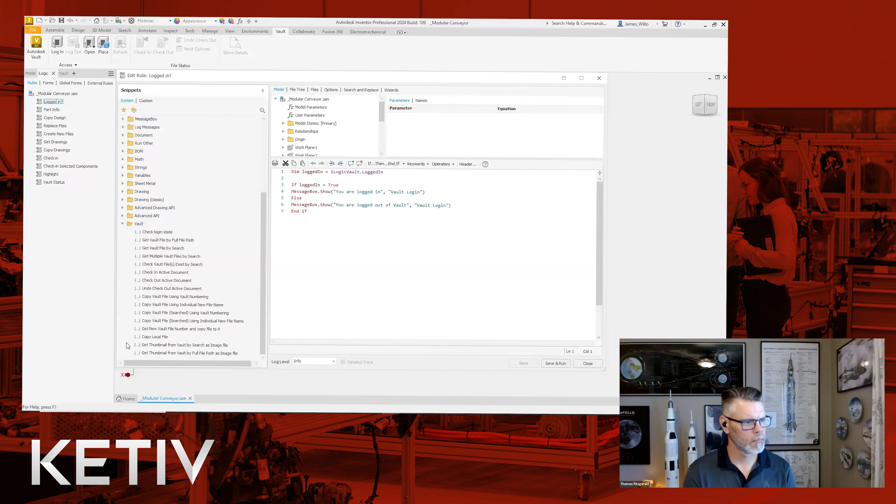In Inventor 2024, you can now use iLogic code directly with Vault. Inside the iLogic rule editor, there are several snippets provided to get you started, but there are many more functions available in the help documentation. Whole new workflows are now opened up, from checking your login status or the version of Vault running, right through to copying a file, applying a Vault numbering scheme, and then checking it out. For instance, I could combine this new code with iProperties to select a component in the graphics area and see a summary of its properties.

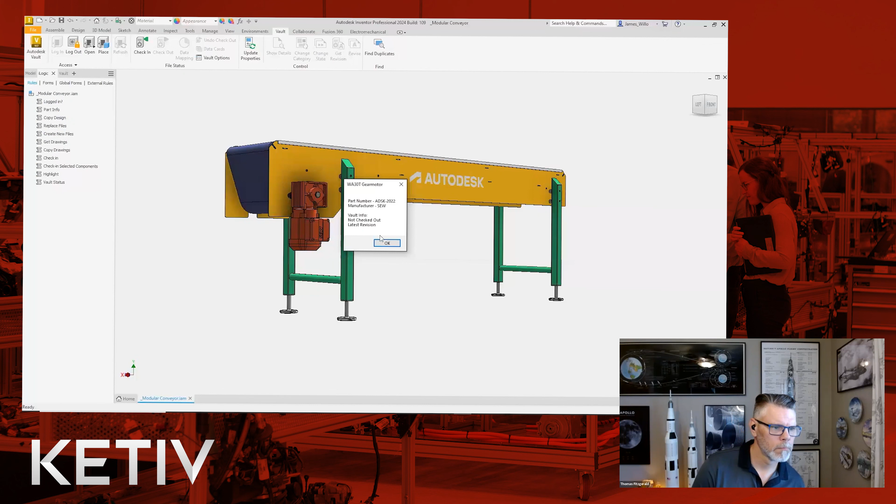We can take this a step further by creating a configurator and pushing the parameters to our parts. Then using the new Vault interaction, get a copy of all the drawings from Vault, reuse any parts from Vault that match this configuration, and then create new files for the ones that don't already exist.

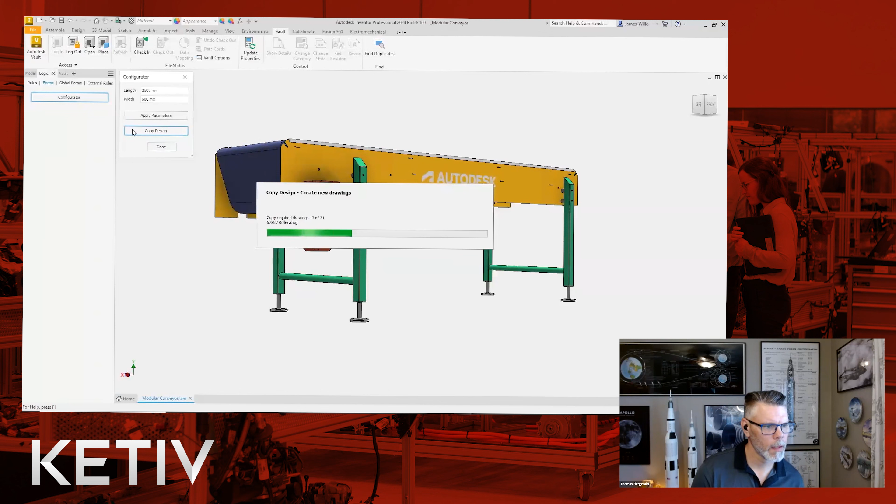Then we can create new drawings to match any unique files. And finally check it all in. We then have a full copy of this configuration ready to manufacture. With iLogic Vault code in Inventor 2024, the possibilities are endless.

I will have to say that is by far the most interesting feature to me for Inventor 2024. This is something that has been asked for a long time. Most of our customers that are using Inventor are also using Vault. They kind of go hand in hand. To me, I always think of Inventor and Vault as peanut butter and jelly. They're made for each other, right?

All the different files that we create, all the different dependencies and associations, we want to make sure that we're maintaining those and coordinating them appropriately, so that way we don't have to deal with resolving links or files that change their location or change their name. We want to be able to apply as much property information as we can to our files, so that way we're not dependent upon a very long or descriptive file name in order for us to understand what kind of file we're working with.

So being able to tie what we're doing within 3D design and engineering and working with Autodesk Vault to manage all of that appropriately, I think this is definitely going to service our customers and help them out with all their activities around developing different automation routines that depend upon Vault as that single source of truth. So look into iLogic enhancements, particularly around Autodesk Vault Professional. Some interoperability enhancements, so being able to work within other systems or sharing information with other systems.

So interoperability enhancements. Right now, there's some updating in both JT and STEP files to include UCS on import. So we can share some of the UCS information to make sure that we have proper orientation. We also have an OBJ import. Performance when opening OBJ files has been improved.

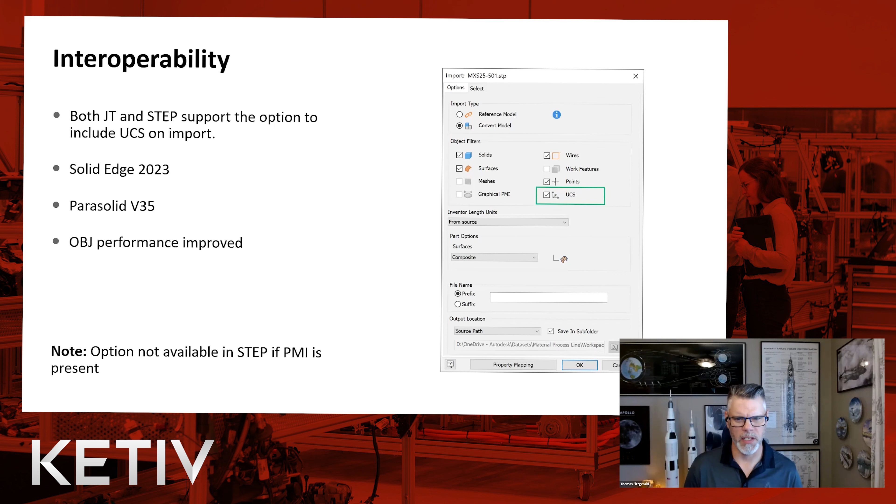Previously, there's been some performance limitations in terms of how we've been working with some of these more neutral files. In Inventor 2024, there has been an initiative to help improve the performance of working with some of these neutral files. So there's some Solid Edge support for 2023, as well as Parasolid v35. All right.

Fusion Link. So some of you may not know this, but there's also another manufacturing design tool out there aside from Autodesk Inventor, and that's Fusion 360. So in Inventor 2024, there's some new Fusion 360 functionality available. From within Inventor, you can send a part, an IPT file, to Fusion 360 to start creating a manual inspection of that file, as shown in this little graphic here.

There's also Fusion exports available. If a change has occurred in the Inventor model state or design view used for a Fusion 360 export, you can now click Open in Fusion 360 in the Export Context menu, and you are notified that the Inventor model and Fusion 360 models are out of sync. So it gives you an opportunity to make sure that they're updated before you open that file. Okay, so some communication happening back and forth between Inventor and Fusion 360.

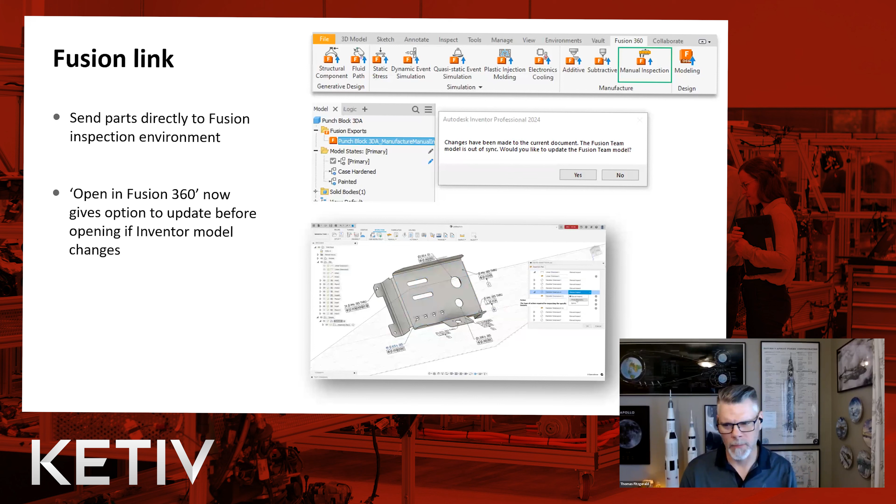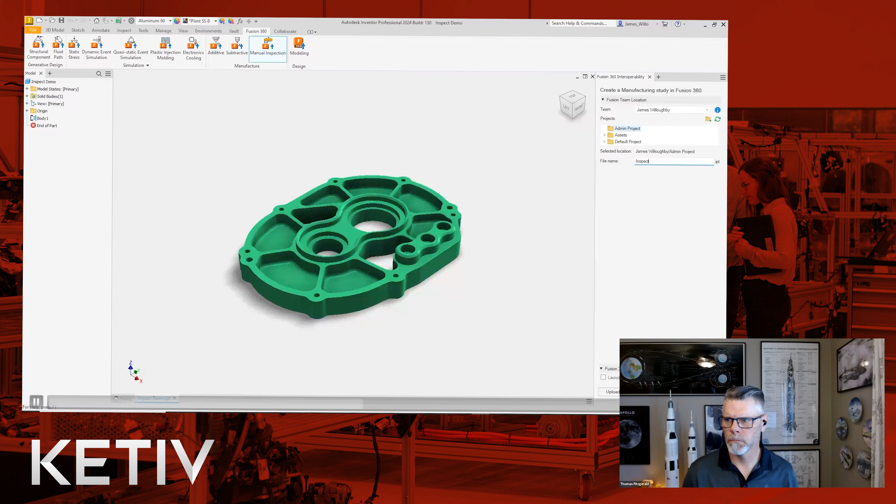Here's a short little video demonstrating that Fusion interoperability. Autodesk Inventor 2024 expands your Fusion workflow capabilities. There is now the option to send parts directly to the Fusion 360 inspection environment. Log into your Fusion 360 account directly from Inventor. Check the Upload folder and type a file name. Then simply click Upload to send it directly to the Fusion 360 inspection environment.

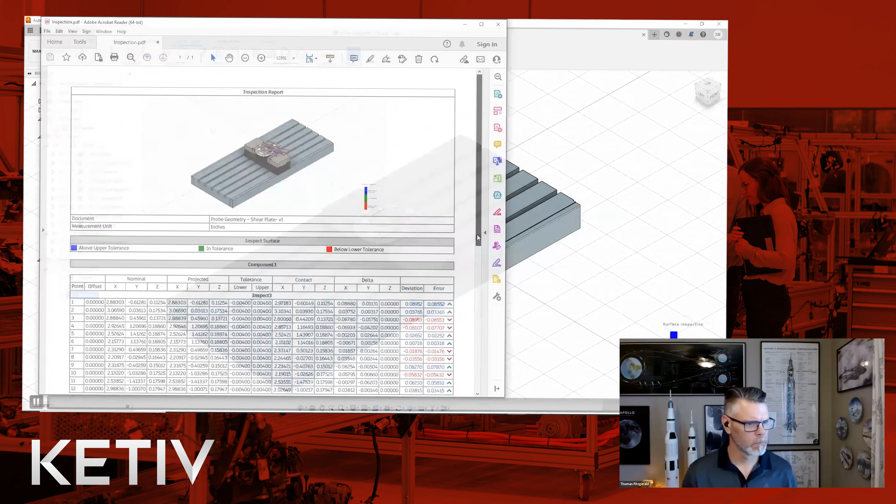After the upload process is complete, Inventor can be set to automatically launch Fusion, and you can start creating an inspection plan. Once that is complete, the inspection report can be reviewed. So that's the new inspection workflow in Inventor 2024.

All right, and I think this is about it in terms of the what's new for Autodesk Inventor 2024. So a lot of different things that have been touched. Once again, really dealing with a lot around performance, graphics, and interoperability are the three major improvements for Inventor 2024.

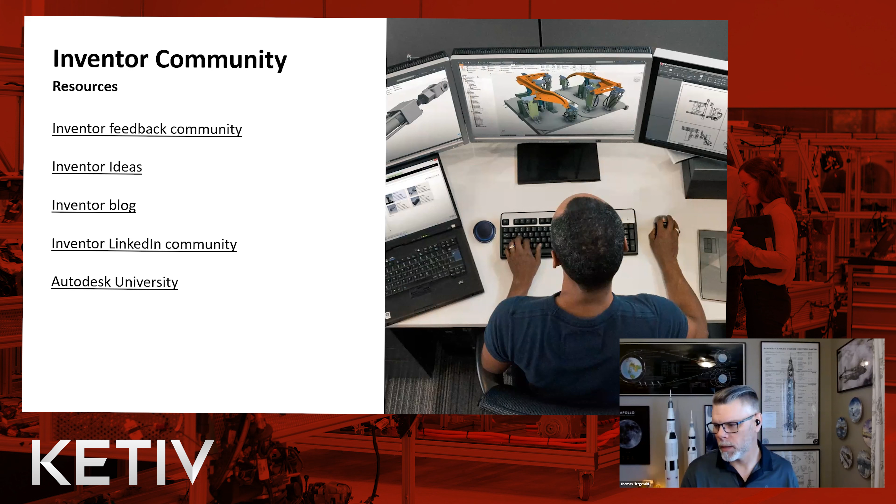All right, now with that being said, we do have a few minutes left here for some Q&A. Let's see, what do we have in the Q&A box here? So do finishes have their own ADSK lib file like that of appearances?

However, because this is a new feature and new functionality, I would probably say that the amount of customization available would be limited. I don't know that as a fact, but I'd be interested in learning a little bit more around what we can do about changing the different appearances for finishes, as well as adding some custom information there.

All right. Some of the other questions that have been up there. Really not a whole lot. What about the chat here? Nobody has any additional questions or comments. Oh, here's one from Jacob. From someone who is using Plant 3D regularly, do you see the advantages to switching over to Inventor? So you're thinking tube and pipe inside of Inventor versus Plant 3D.